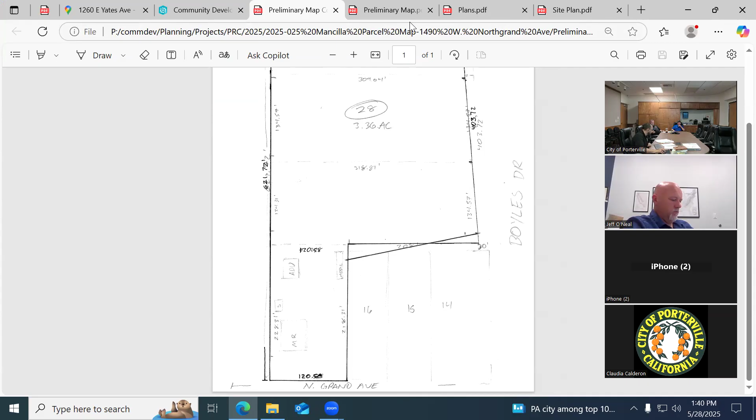As stated, we do have three items on the agenda today. So let's start off with the first one, which is PRC 2025-025, which is the Mancilla parcel map. Let me go ahead and share my screen here of the preliminary map. Okay. So the applicant is proposing a residential parcel map dividing the existing parcel into 4 total lots. The property is located at 1490 West North Grand Avenue. The property is zoned very low density residential and has a general plan land use of low density residential.

As far as comments from planning, the project would have to meet our minimum standards outlined in the Porterville Development Ordinance related to the lot configuration as far as dimensions. So on this preliminary map, it does look like it meets our minimum standards. Any future development within those proposed parcels would have to comply with our residential district's development standards. As far as the land division, it will require to process a tentative parcel map. And to finalize that process, it will go through a final map.

As far as fees associated with the process, there is a tentative parcel map fee of $1,500. It will require an environmental evaluation, which staff can make the preliminary determination for an exemption. There is a $79 fee for staff to prepare a notice of exemption. There will be a county filing fee for that document to be filed with the Tulare County office, and that fee is $58, which is made payable to the Tulare County clerk.

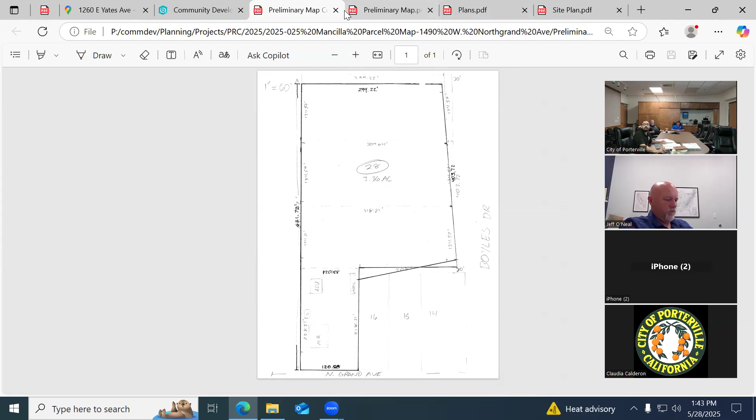Okay. Next, we'll move along with our fire department with Clayton. The fire department doesn't have any comments relative to the lot split. Our comments will come when the properties are developed. Thank you. Next, with our engineering department with Javier. Right. Yeah, thanks, Oscar. As far as the lot split, is the plan just to, well, there's the ultimate plan. That one and this one, which are similar.

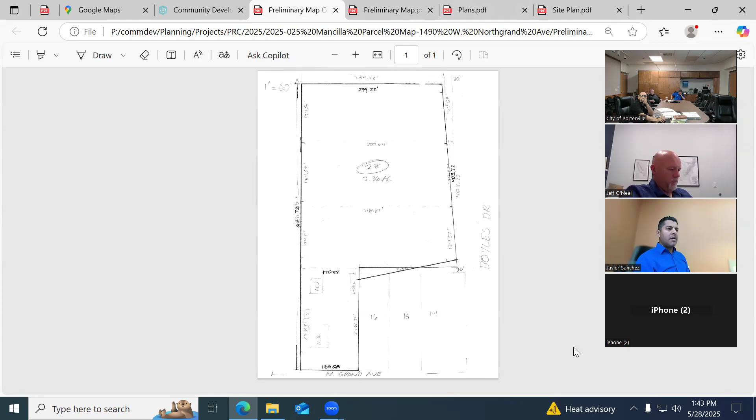All right. Just let me see, is that existing home already connected to city services, water and sewer? The main home is a well. We do have city sewer. Hmm. Okay. See.

Because what's the total? What's 39? So I'm just looking at the utilities there in the area. There is both water and sewer in West North Grand and also Boyles Street. So it would require connections at each of those at the time of development. But since the existing home off of North Grand is already existing, a condition of the parcel map would be that one would have to connect to city water because wells are only allowed within the city if it's a 5-acre parcel minimum size.

But being that it wouldn't be grandfathered in. No, it's existed now just because you've had it this amount of time, but anytime you're trying to split up land or develop a project, that 5-acre rule comes into play. So unfortunately, that would be one requirement of the project, that the well would have to go away. And then all the other lots on Boyles would just connect to city water when they develop. Got it.

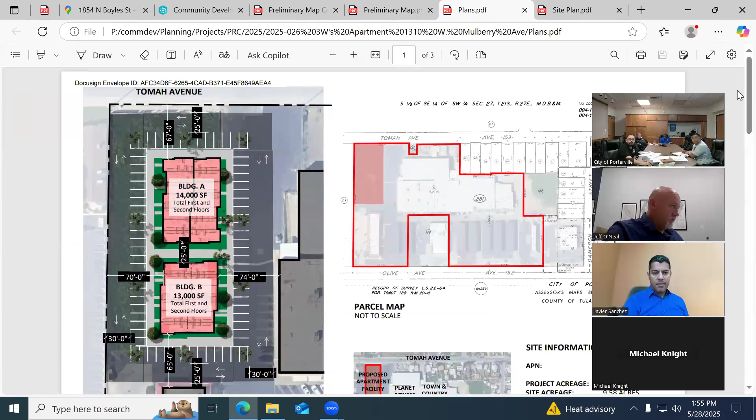Sounds good. Now just to finish off on planning's comments. We do have our landscaping standards outlined in section 303. Make sure we comply with that. Making sure we meet our minimum parking requirements for the project. It will require each unit to have at least one covered parking stall and that stall to be designated for that unit. You are allowed signage for your project. Minimum one building mounted sign and one monument sign, not exceeding a cumulative sign area of 32 square feet.

I don't see any trash enclosures here, but it will require at least some sort of refuse area. Any fencing complying with section 300.03. Making sure all utilities, which include electrical, telephone, cable TV, and similar distribution lines providing direct service to development sites, shall be installed underground within the site. And that's our preliminary comments from planning.

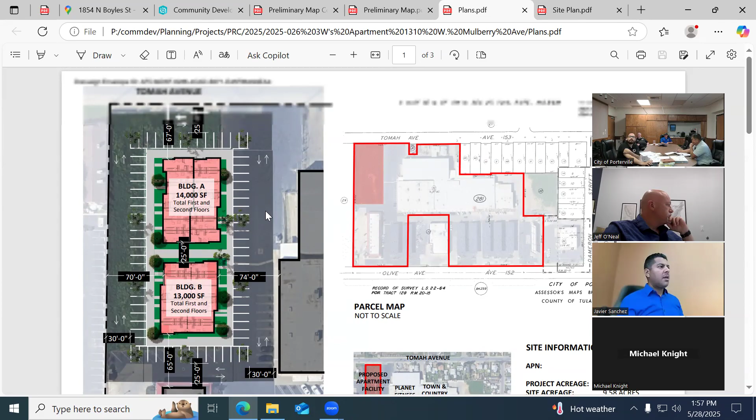Next, Javier, do you have any other comments on the project? Just that the frontage improvements on Tomah would need to be completed. And whether or not you've taken into account that that drive approach would have to get shifted with a realignment of the drive getting pushed to the east. I know that thing. So that one goes away, yeah.

And what we'd be recommending is that the whole front 5 feet be taken out and then landscaping put in to comply with our new standard. And then just this offset sidewalk, but that drive approach, that main one into the backside of that complex, that east ramp would have to, well, I'd have to measure the distance, but in essence, you'd have to shift the whole drive to the east, which I know was substantial because that was all 8-inch thick rebarred drive approach.

Is there a minimum drive approach width that we need to maintain? Minimum would be probably at least 24 for two-way. Okay. But again, with it being kind of a major, let me see what these front ones look like. Looks like these smaller ones on Olive are 30 feet. Yeah, 30. So again, to be consistent, probably 30, and also just to take into account there's delivery trucks going through there and stuff. Sure. And it'd probably be a good size to maintain. Right now it's 40.

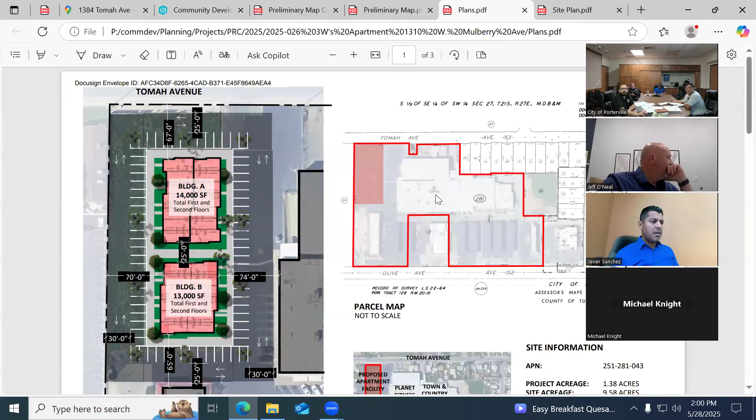But besides that, let me see. That would be all of engineering's comments. Thank you, Javier. Next with Clayton with our fire department.

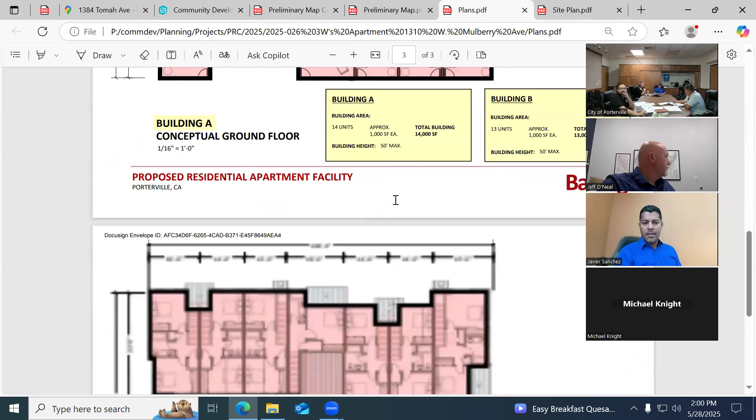So the project shall comply with the latest applicable codes. Fire hydrants shall be placed based on distance and required fire flow. No greater spacing than 300 feet for multifamily residential applications. Where 2 or more hydrants are required for a project, fire hydrants shall be on a looped system. Depending on the location of existing hydrants and the required fire flow, additional hydrants may be required. All hydrant locations shall be approved by the fire department.

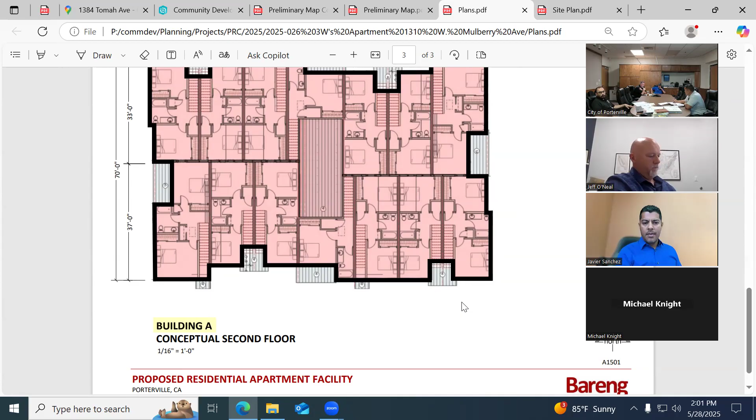Fire hydrants located across a public street shall not be utilized for calculations or considered as available to meet the fire flow and/or FDC connection requirements for this project. No structure shall be greater than 400 feet from a fire hydrant. All hydrants must be in place and accepted by the fire department prior to any combustibles being brought onto site. These are standard comments. There's hydrants there, but it's probably going to require an additional 1 or 2 potentially.

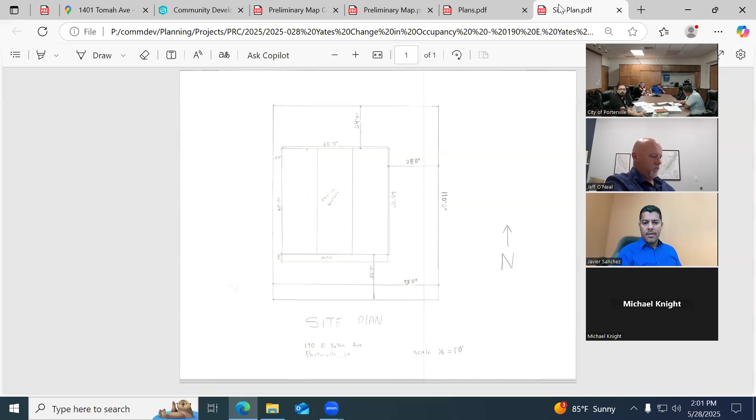So moving on, project to meet the minimum fire flow requirements per the table in Appendix B of the 2022 California Fire Code. Fire sprinkler plans and calculations required. Underground plans shall be submitted with above ground plans. Fire alarm monitoring plans required. The fire department connection shall be within 50 feet of a fire hydrant in an approved location. Where site conditions permit, the FDC is to be located no closer than 40 feet from the building. Maintain 2 entry exit points, which you have, the minimum 20-foot roadways for fire department access around.

Fire extinguishers, address numbers, and it's not going to be gated or anything like that? No, okay. And we don't need Knox access. Yep. Any questions? Minimum turn radius is about 35 feet inside, more or less. Currently, the fire code has a 28-foot radius for the turn, but we are getting a new piece of equipment. And so I am waiting to get the new turn radius for that so that I can amend the code to meet whatever is most restrictive, because we're getting a tiller.

Oh, okay. So they're more maneuverable, but if the back axle is locked, then it needs a wider turn radius. Got it. Okay, so right now it's about 25, 28. 28, yeah, 28 right now is what's in the fire code in Appendix D. Thank you. Next with building with James. No comments during PRC. Any comments related would be during review.

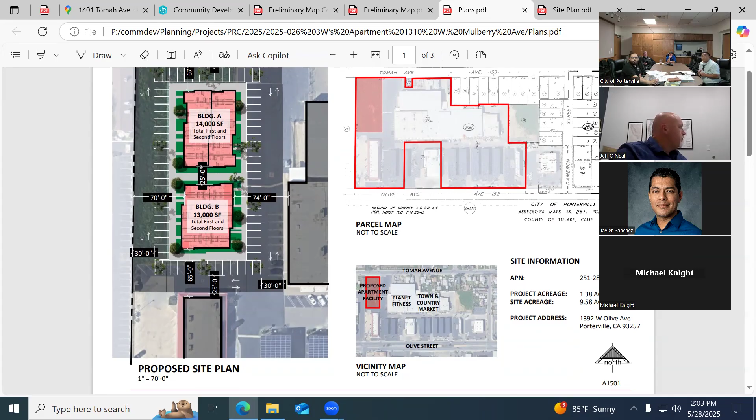This shopping center is an older shopping center. Majority of all the other shopping centers throughout the town, they are separated with a backflow preventer at the curb line.

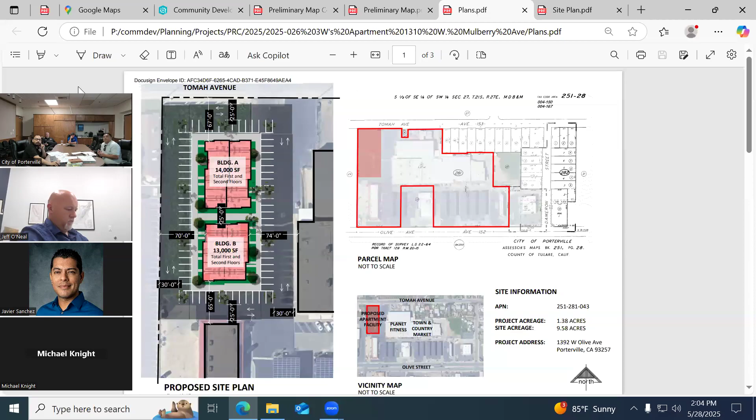And that does become a kind of a private service line for the facility. So this is something that we haven't dealt with in a number of years. So we'll just need to get those comments back to you on what the impacts are of the proximity of that existing main in that drive aisle. Sure. But no further comments for me. Thank you, Mike. Oh, I take that back.

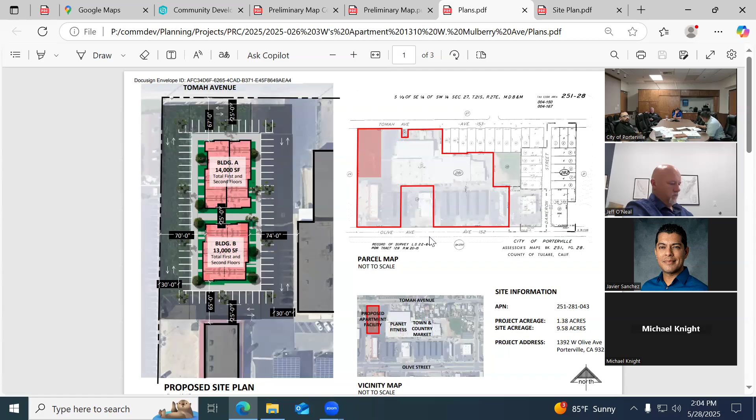One other comment. So along with the backflow preventers and the water service, it'll need to have a dedicated landscape meter and domestic meter for the facility. So if you're doing multiple meters for units or one master meter for all units, the project will require separate landscape meters for the development. Good. Just making sure to get that statement out. Thank you, Mike.

That's all the comments today from the departments. You will receive each department's comments on the letter in about a 2 weeks timeframe from today's meeting. Does the applicant have any questions at this time for staff? Solar panel requirements and electric vehicle charging station requirements. That'll be Javier or James? Yes, on both. Good. Okay, perfect. Yeah, unless there's any other questions, we'll keep an eye out for that letter.

And then I will just add another comment. If the application doesn't move forward under the SB 330, we will provide information related to the possibility of a zone change and general plan amendments, because as is, the project wouldn't be able to proceed unless there's an amendment. Sure. Clarification question on the SB 330. Was that 100% affordable housing, or, I can't remember if there was a minimum requirement. I believe it is 100%, but Jeff, if you're able to answer that question for us.

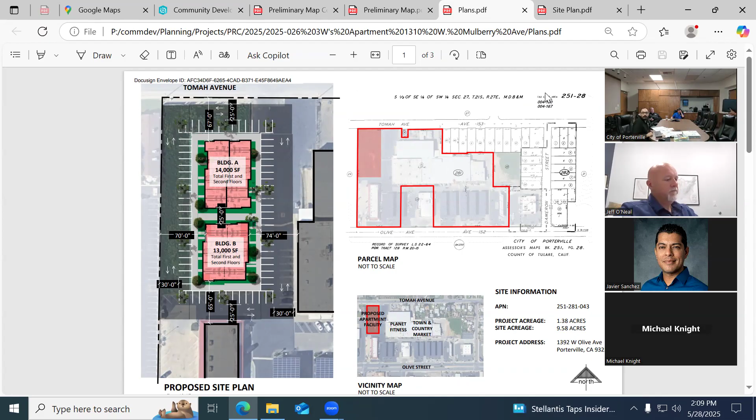All right, moving along here with our next item on the agenda, which is PRC 2025-028. We're calling it the Yates triplex, located at 190 East Yates. Want to join us at the table? Thank you. All right, so we have PRC 2025-28. The applicant is proposing a change in occupancy from the previous established use, which was a religious facility, to accommodate a future residential project.

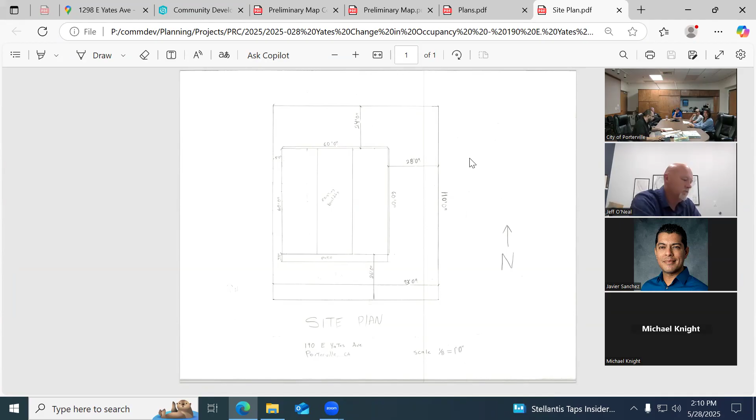The subject site is located at 190 East Yates. The property is zoned RS2, which is low density residential, and also has a general plan land use designation of low density residential. So for planning, I'll be providing the comments. Going back to the zoning, it does not allow multifamily projects, in this case, a triplex.

However, there are certain state laws that the applicant can pursue. For example, SB 9 projects, in which you can have two primary units on a single family zoned property. The applicant can utilize that to have two units on the property. In addition, there are also accessory dwelling unit laws that the applicant can apply for and could get another unit, maybe a total of 3 to 4 units on the property.

But as far as having 3 units attached as a triplex, there's not currently a mechanism to allow that. So future development must comply with our RS2 zone district, meeting the minimum setbacks, and covered parking for the units will be required. If you do move forward with 2 primary units, it will require 2-car covered parking for each unit.

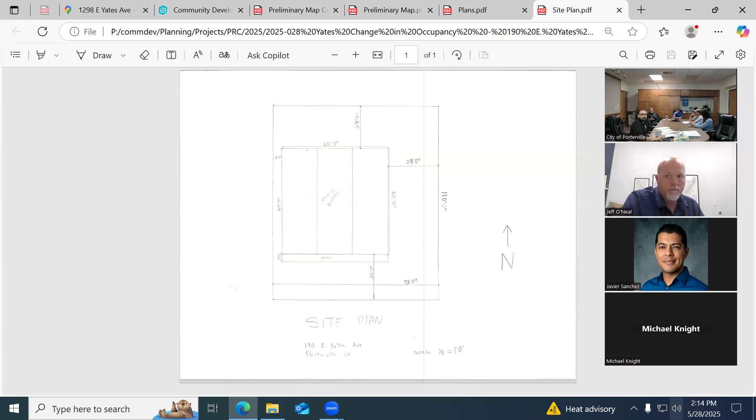So I had called too, and they said it was in the city limits. They didn't have anything in the county. Yeah, but the assessor's report is something that the county has for all properties, because the assessor is the one who determines the amount that the tax collector collects. So they have it for the whole county, even in the cities, for every property. He went to the assessor's where the courthouse is, across the way, a little hallway, and they sent him to that one, is it RMA? But did he ask for the assessor's report at that location? Because we send people all the time. We get them all the time.

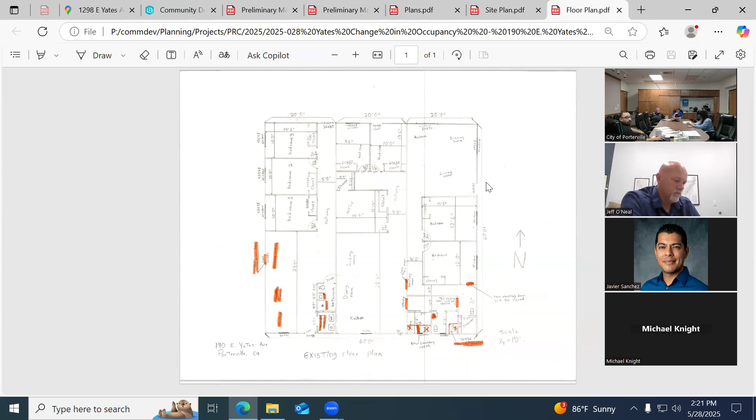So when he says FDC, if you go around to some apartment complexes, or Lowe's for example, you'll notice the thing out front that has the two red caps on it. So when the fire department shows up, they hook up to that, and then hook up to the fire hydrant, and then we pump water into the structure at higher pressure than the city water can provide. And that's 3 or more units.

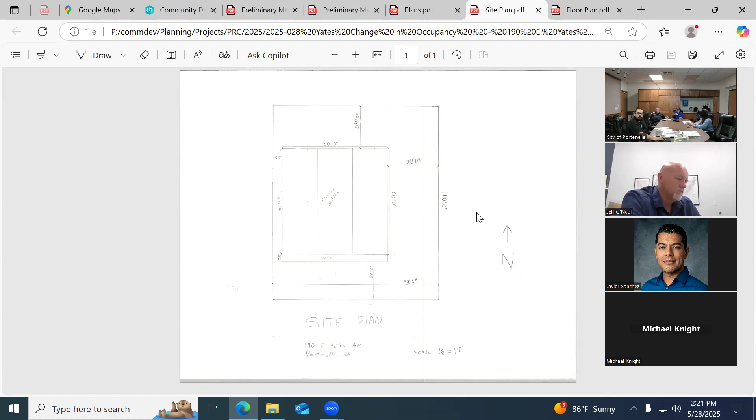If you have 2 units or less, you don't need that connection, but you still need fire sprinklers and a fire hydrant. No matter what, you'll still need sprinklers inside the building, and you still have to have a fire hydrant within 400 feet. It may seem like a lot, but the code looks at worst case scenario, fire and life safety.

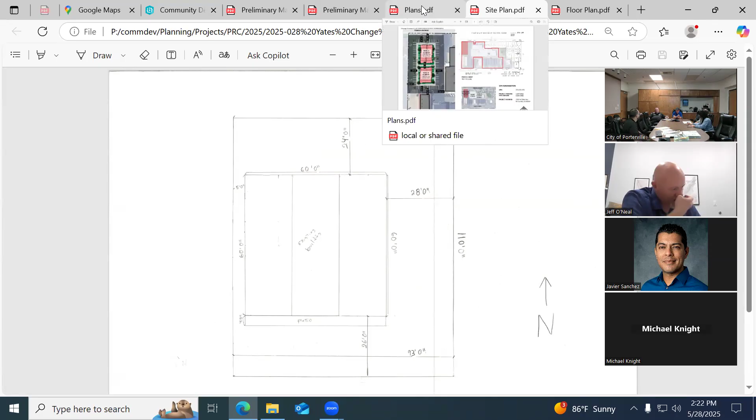So if it was commercial as a church and they didn't require it? So back then it was county, the county island, we would have had no control over what they required. I believe that area got annexed in 2015. Yeah, so it was county before that, but now that it's in the city, this is the opportunity when things are changing occupancy that we can come in and say, okay, you have to build it to the code of today, which is how infrastructure gets updated.

Is there any kind of, like the sewer, you can add it onto your tax roll, so you don't have to pay the whole thing now? So I don't know, usually it's part of the construction project. As far as deferring payments for sewage and stuff like that, I don't know if this area falls into a program like that, but we don't have anything like that. But we have Javier that could possibly outline that information. Javier, any comments related to that?

I believe this area was part of a sewer annexation project. And the question was if there's a way that they could make payments or delay. The sewer could be deferred to the tax roll. Yeah, the sewer is being billed on the tax bill twice a year. And as far as other utilities like water, we don't have a program like that, but what we do have is a 3-year loan, I think we just modified that. I can't remember what the interest is on it.

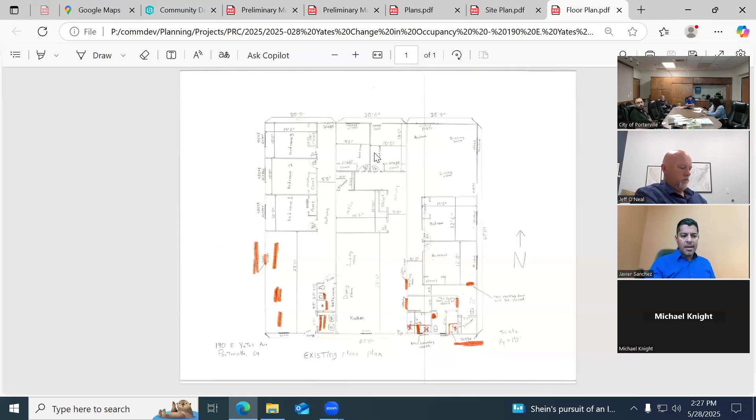Yeah, and I know some of the trusses were rebuilt. Even if they were like for like, you can't ever touch a truss without getting an engineer involved in it. So you'd want to get an engineer for any truss fix. Okay. Yeah, other than that, like Thane said, it depends on the fire sprinkler system and what would be allowed. All that would have to be submitted at the same time. There's no deferred items when you're submitting plans.

Thank you, James. Oscar, you said that they gotta have covered parking too? Yeah, so since the last established use was a religious facility, and now you're wanting to convert it into a residential use, parking is something that we're gonna have to evaluate with the project. If you are able to proceed with a multi-family project, it will require minimum one covered parking for each unit. In addition, depending on how many bedrooms, it may require two parking per unit. So we'll provide that information in the PRC letter.

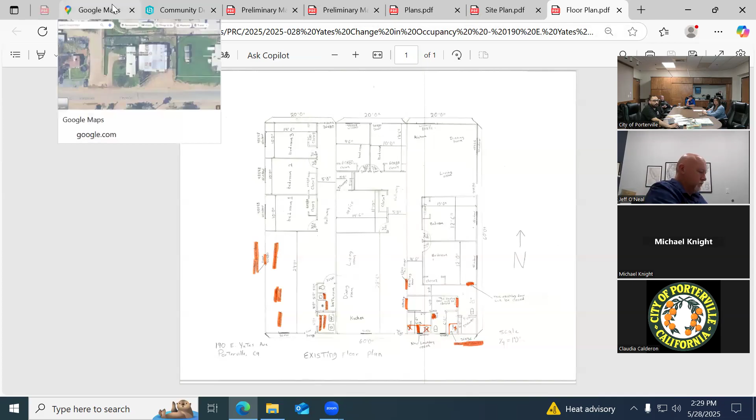Yeah, and then you also are running into other codes. For example, lot coverage that we also have to evaluate, front yard setbacks, and so forth. Just an example, this zone district allows no more than 45% of lot coverage. However, our code does have a mechanism to request an extra 5% from our zoning administrator. That is something that we'll be evaluating when you submit for your building permits.

And then if they do covered parking up front, to keep those units from being sprinklered, it'd have to be a 12-foot separation. Yeah, and then the parking cannot be within the front yard setback. So that is something the applicant, coordinating with an architect, could maneuver. Yeah, that's gonna be tough. What would be the best option then? Well, that's up to the designer to know how the code reads and fit what's required based off the project. We don't design it. We just give you how it reads. Yeah.